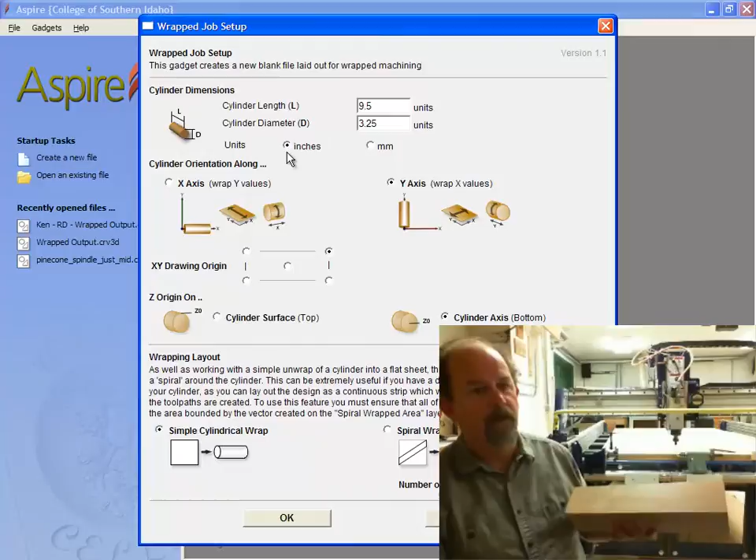Make sure you get the decimal point in there, and make sure you're on inches. We're going to go along the X axis. No, we're in Y axis always on our ShopBot. The XY is drawing origin, top right. We're going to do center of the cylinder axis. This time you're going to click on simple cylindrical wrap. Click OK.

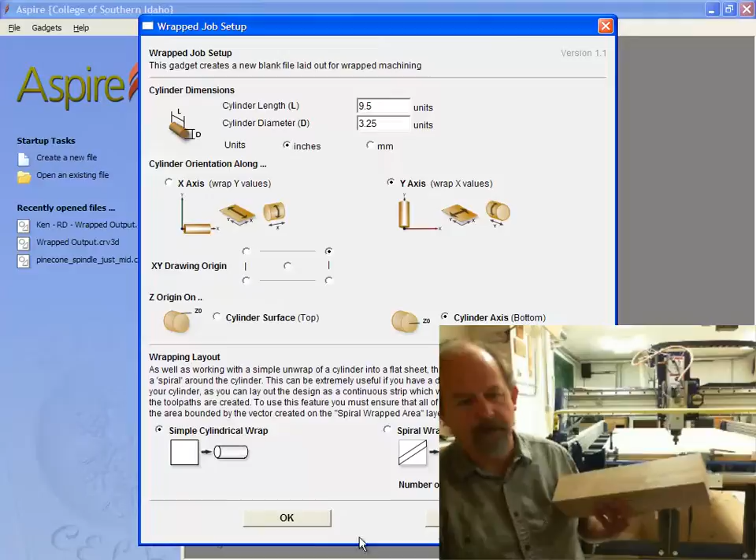We're going to go to Gadgets, under Wrapping, under Create Rounding Toolpath. The size of our square is 3.5 inch by 3.5 inch and 16 inches long. You want to make sure that this dot is highlighted. We're going to go down here to rastering. We're going to start with a square because we're going to leave some of these ends square already, so you want to make sure that the rastering down here is clicked.

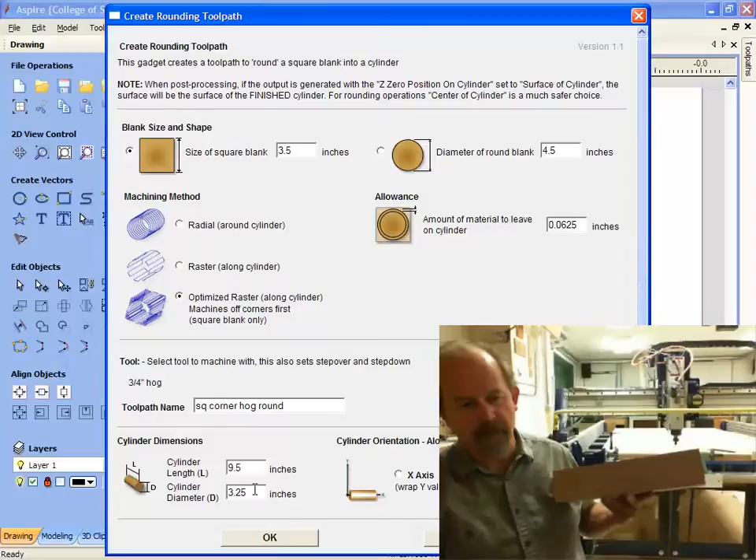We'd like an allowance of 1/16 of an inch, and we've typed that in here. Of course, we gave it a toolpath name of Square Corner Hog Round. You can name it whatever you want. We're just trying to get rid of the extra material we do not need. Our cylinder length is 9.5 inches, our cylinder diameter is 3.25. We're on the Y-axis. Click OK.

We're going to go up to Toolpath now, so click on Toolpath. You can see that a toolpath is created, and we can look at the 3D view, and you can see that it does show your toolpath. The extra lines here are showing the corners that it has to go through to cut.

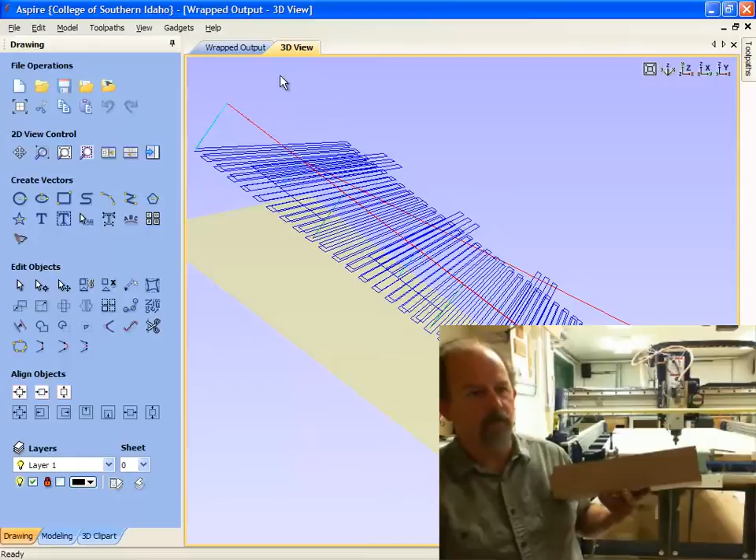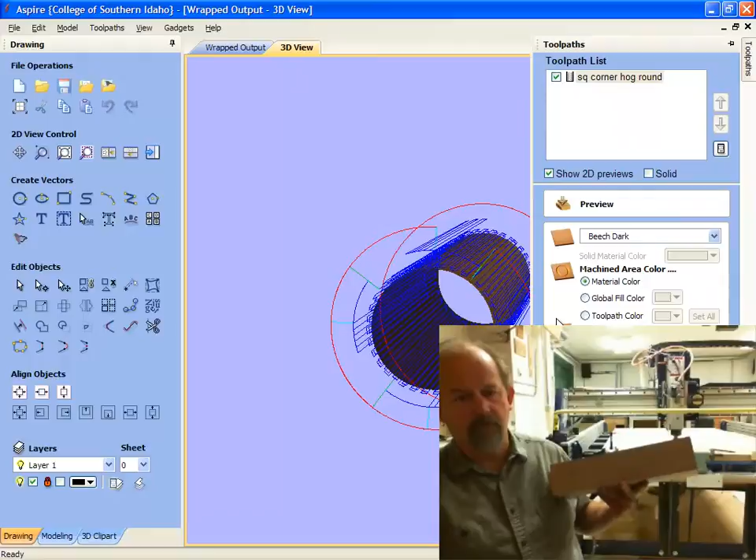If you want to see that that is round, we can go to Toolpaths, and under Toolpath Drawing you can click on Wrap X Values, and you can see that it's going to show you a cylinder. You can click on Preview, and we can preview Toolpath, and then it gives you a cylinder. Don't worry about that it's empty inside right now, we're just concerned with the outside. And so you have a cylinder.

Most of the time we'll be looking at creating a new file in Aspire. This time we're going to go to Gadgets. We'll go to Wrapping. We're going to Wrapped Job Setup.

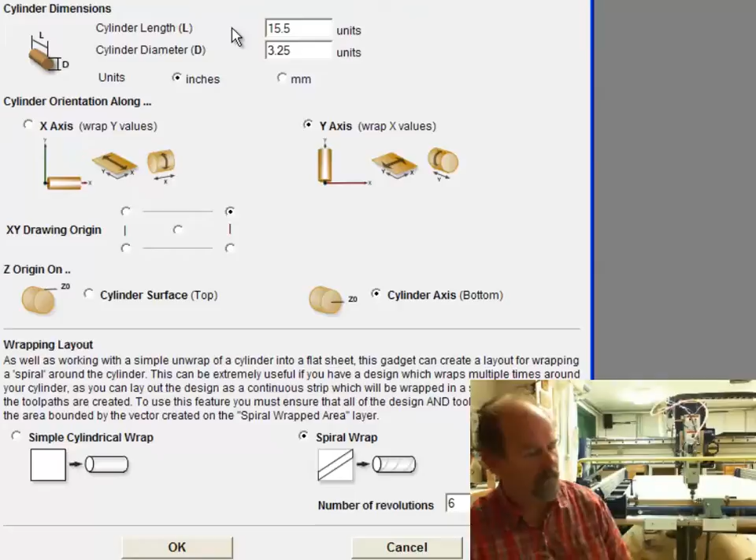We're going to get the length of our piece. And what we're doing is we're going to make a leg for this coffee table, and we'll have a square block on the bottom here. This will be the bottom of the indexer, top block of the indexer. In between here, this is what we're drawing.

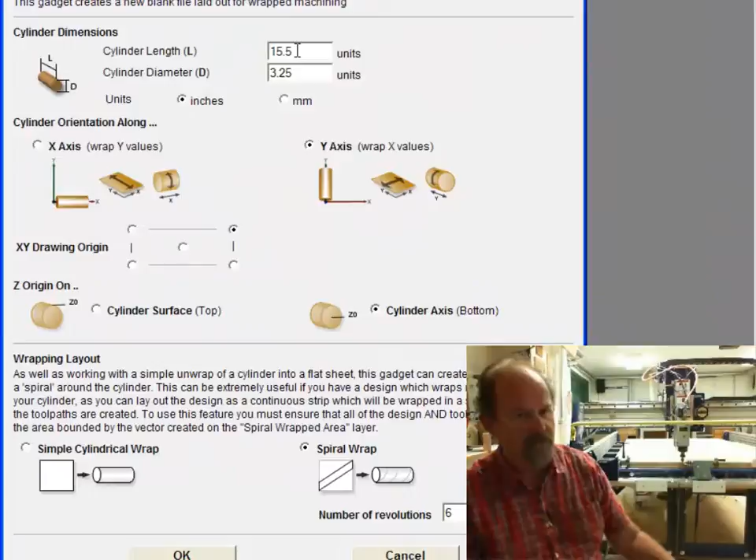We're doing a rope twist. So you'll need to make sure that you have 15.5 inches, which is the total length of the leg, minus our 1/2 inch. This is very important to make sure that you do at the maximum 3.25 inches.

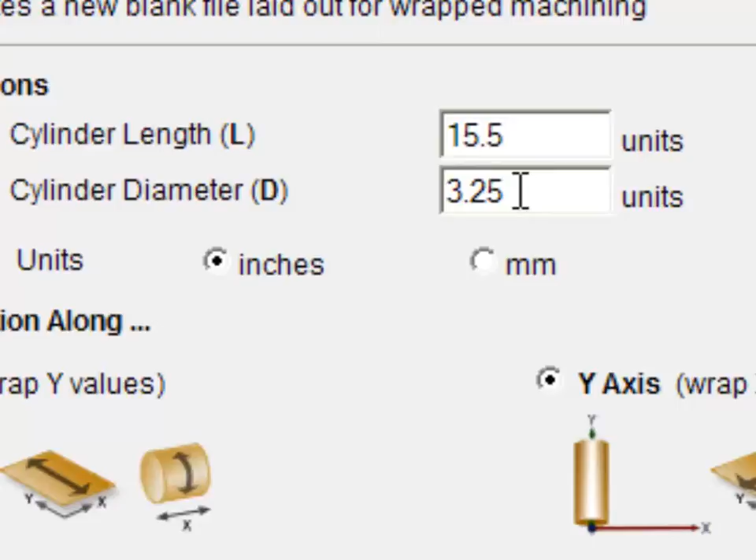Notice that I made it 3.25 inch on the cylinder diameter. That is going to be the radius around the rope area. However, my block is 3.5 by 3.5. So the reasoning behind that is when the indexer will cut and make the rope, we want to make sure that it's going deep enough so we don't leave any flat spots on the top of the rope twist. This will happen on a generic lathe as well, so you always have to cut a little bit deeper. On the indexer, we just do that to make sure that we have some depth of cut.

You want to always click on the Y-axis on our ShopBot indexer. This is explained in our previous video. Notice that we've selected under your XY drawing origin the top right hand, which is the bottom of our leg. Always click on cylinder axis, because that's taking us from the center point there, and that's where we Z and we center the Y, which is very important to get right in the center of that so that you can end up with your correct size.

Look at spiral wrap, and we want to click on that. If you were just doing a simple cylinder, a round cylinder, you would click, of course, on the icon simple cylindrical wrap. If we're on spiral wrap, click on that. Number of revolutions, what I want to end up with is 6 pieces of rope on top of each other. This, however, you can select a different amount, it'll wrap differently.

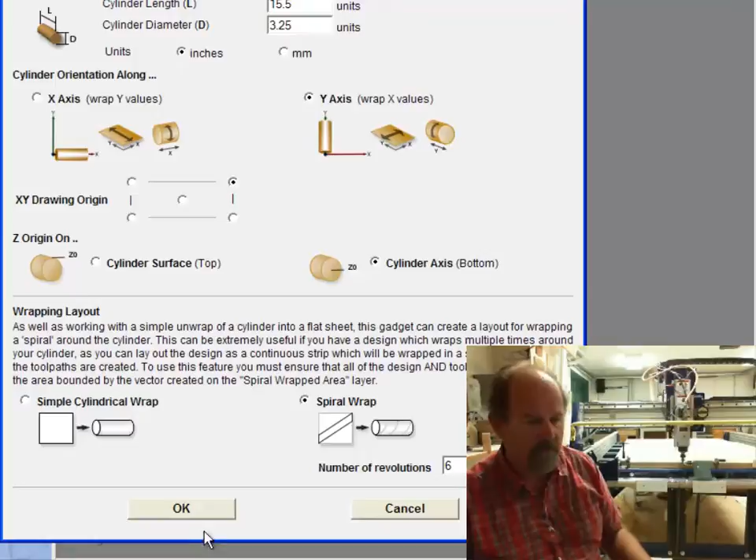Notice how our screen looks - this is going to be a little bigger and might not look correct to you. We'll cover that, but as soon as we wrap this, it'll make total sense once it wraps the drawing all the way around.

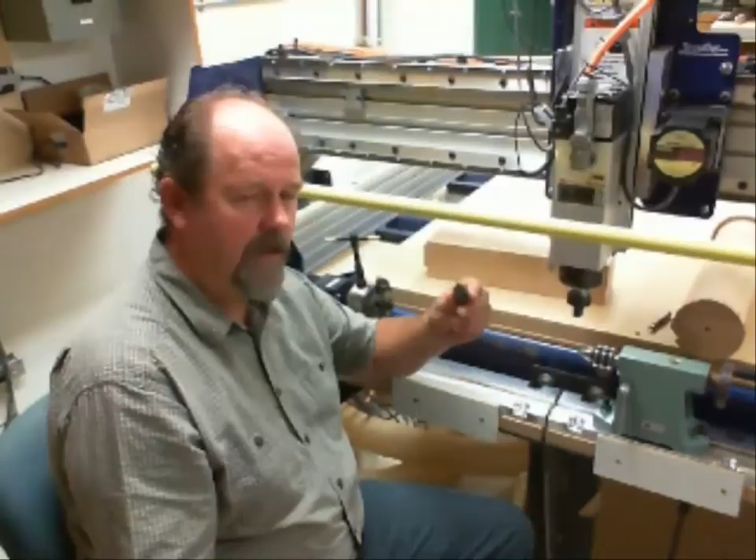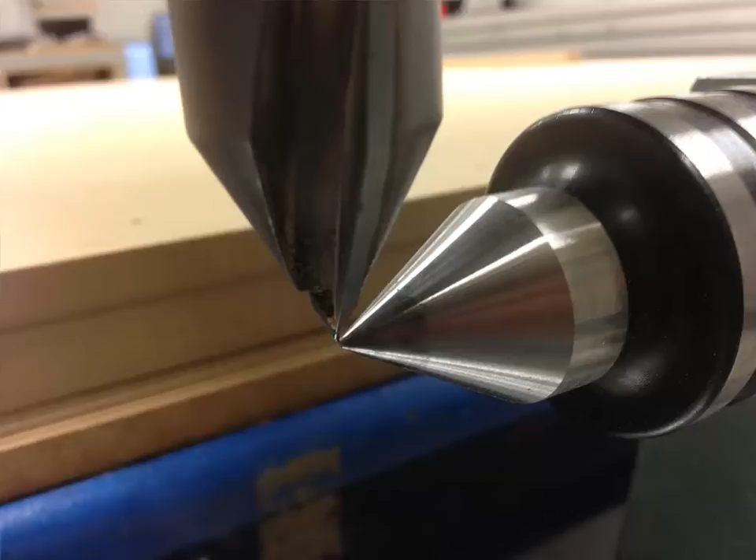Now we're going to set up the ShopBot Indexer. We're always dealing with 3 axes. We want to center over the tailstock. Earlier we used a V-carve bit, since it's so pointy, and adjusted the head down so we're centered right over our tailstock, because as soon as we give up our x-axis, this becomes used by our indexer, which is the a-axis. So you'll only be able to do z, up and down, and we'll z it here in a moment. We'll be traveling on y-axis, and our indexer is the a-axis, but it gives up x.

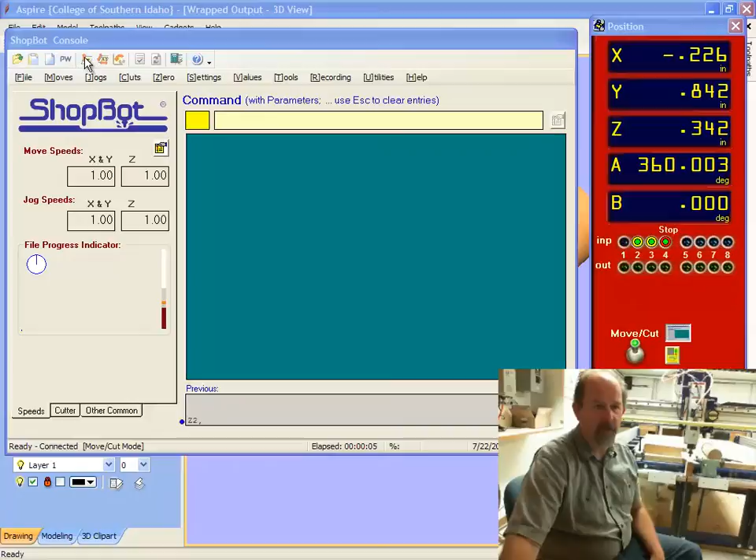If we set up an offset of this, it's going to mess up all of our calculations already done on our former program. So when we're going to do a Z, you want to cut a block that's dead center on height. We can put our Z plate down, then click on our Z and it'll come down and touch. With your ShopBot running, we have our Z plate in place, and we're going to come up and double click on our Z plate command. It'll always throw a box up as a secondary safety - enter when you've got the plate where you need it, click OK, and you'll notice it comes down and touches twice.

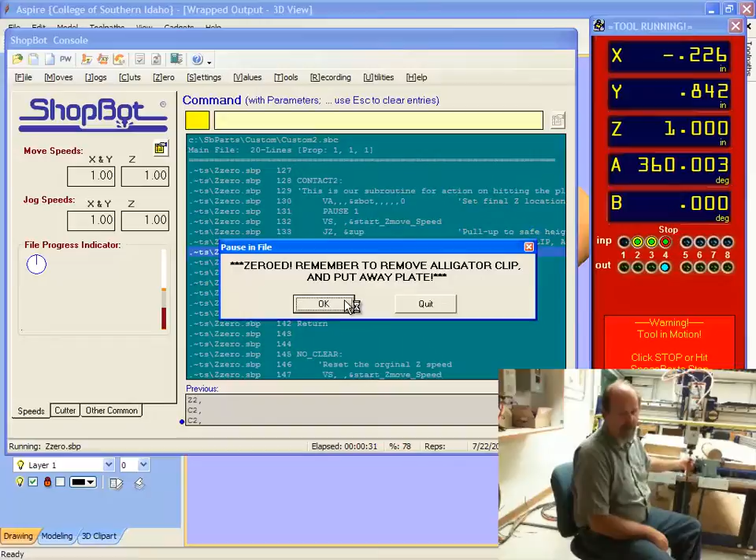Do not forget to move this. We've had students leave it here before, and it will get thrown out of the way. It can tear bits up, can tear other things up too.

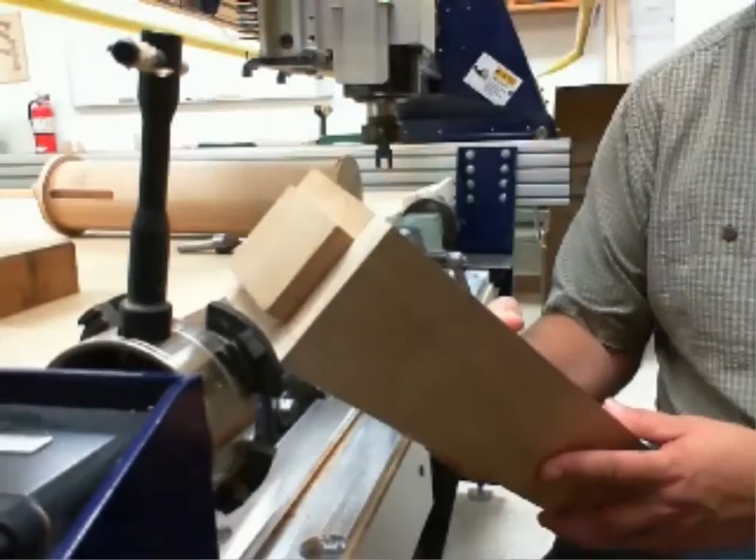Before we do that though, we found center of the end of our board so that we can find center of our tailstock. You can just adjust this in. Make sure you're snug up in the Nova chuck. Tighten this Nova chuck down. If you're not sure if it's tight or not, put it in a secondary hole too, and make sure you're tight. Tighten this up.

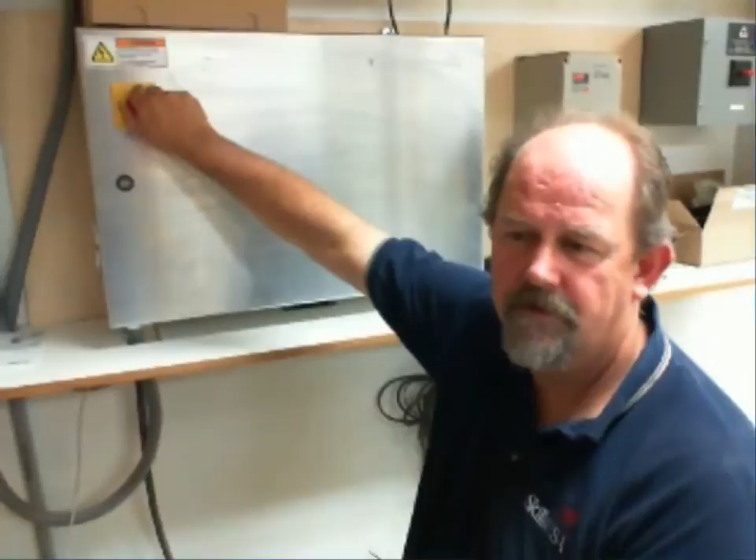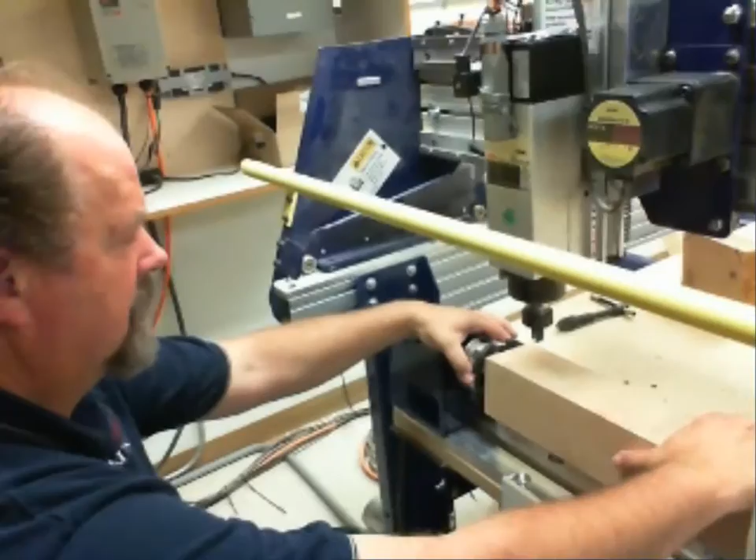Make sure you turn the ShopBot off so you're not fighting the servo motor to try to level this up. Now you can see how you can rotate the servo motor. If it's on, you'll be fighting the motor. We don't need you to tear up the motor.

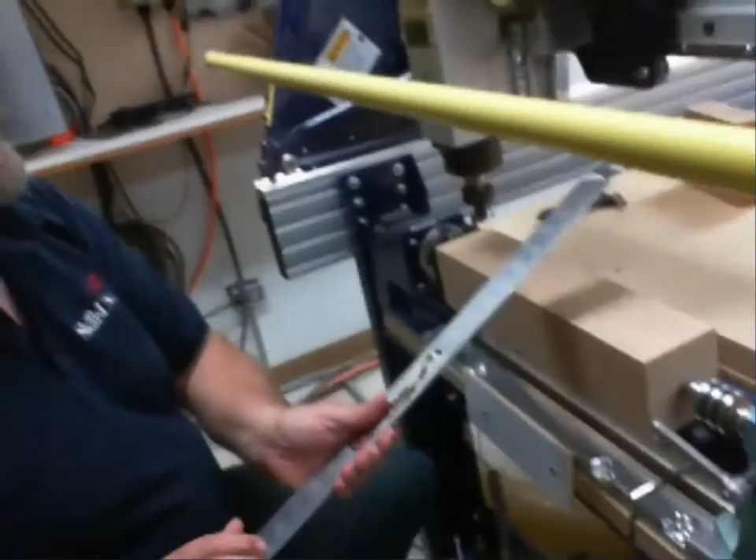You can just get a common square. You can use the front of the motor and level it. Notice how I'm sitting nice and tight to the motor now. That's sitting nice and true. And there you go. Now we can turn it back on.

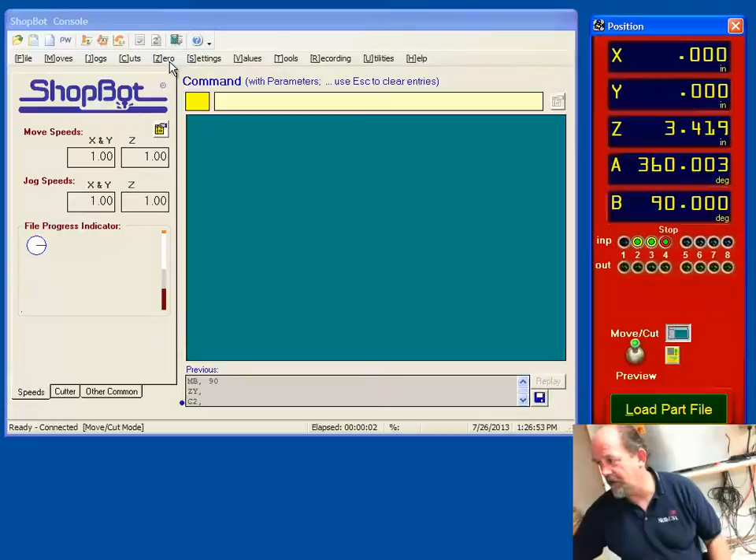You'll have to hit the reset. Click on OK to get that box out of the way. Now we can set up and zero our Y coordinate, which we've already done. We've went into our Zero command, clicked on that, went to y-axis and zeroed it. Now we have Y, Z, and X - or which becomes B on the indexer - all zeroed, and we're ready to do our rough cut.

We're doing our rounding path at this time, so we've already set all of our coordinates. Notice that we're leaving the top and bottom of the turning square - this is because this is the style that we want. We're just doing a round, 2 squares on top and bottom. If we were going to make a full radius all the way around, such as this one, we would 45 the corners off, so it would be less work for the CNC.

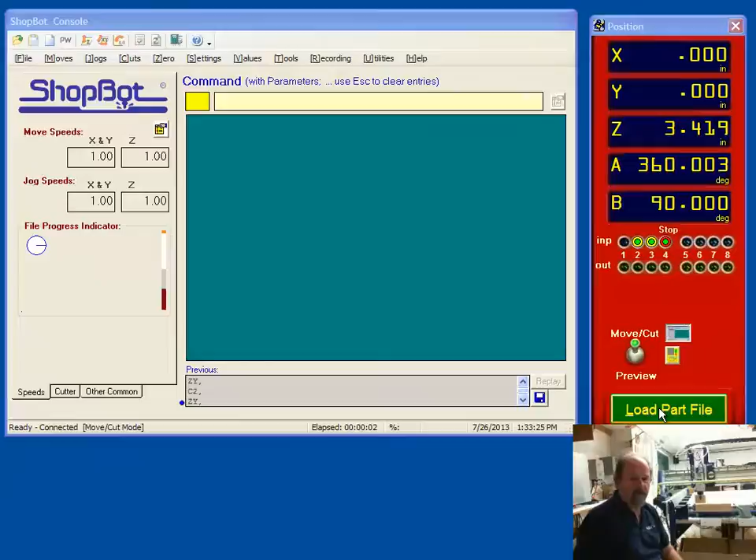You want to load your part file, go to Square Corner Hog, click on it, open the file, start, and set the router RPM to 12,000 - excuse me, and ours is already set on 12,000. We're good to go, click OK.

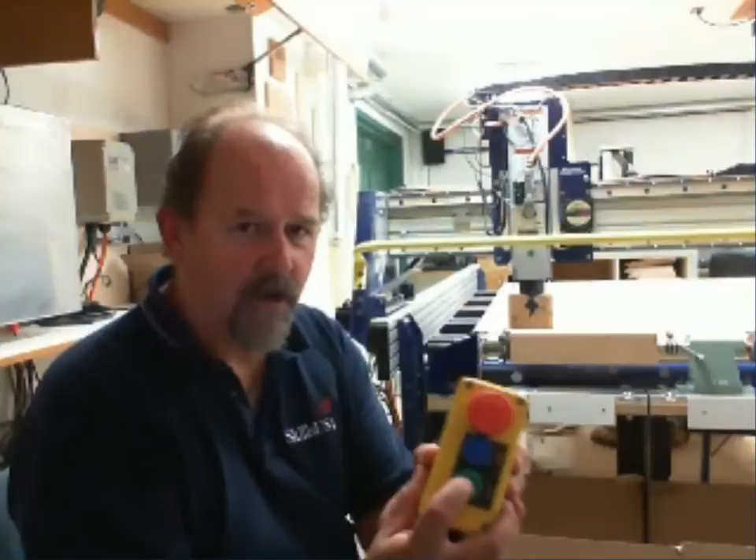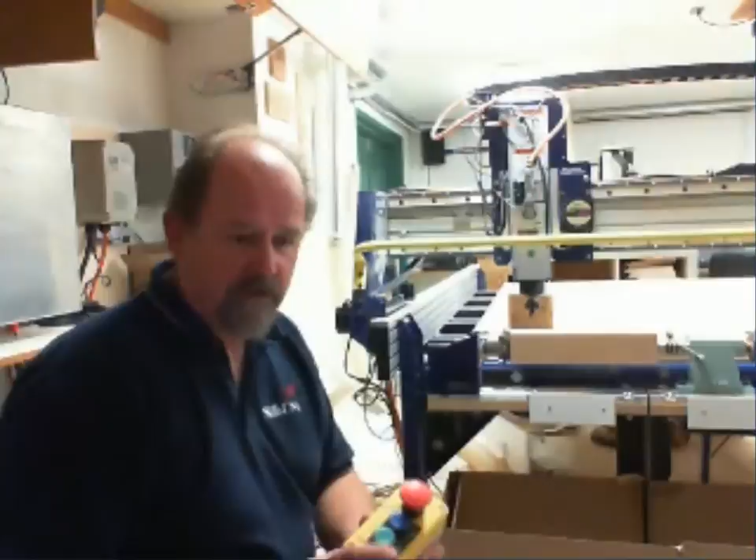At this time, this is where you can make a bad mistake. Make sure that you turn on the green start button before you say OK. If you accidentally click OK, it will drive this cutter into your work without it cutting, and you could break the bit or hurt the servo motor. So make sure you turn it on. Notice it's not moving anywhere until you click OK.

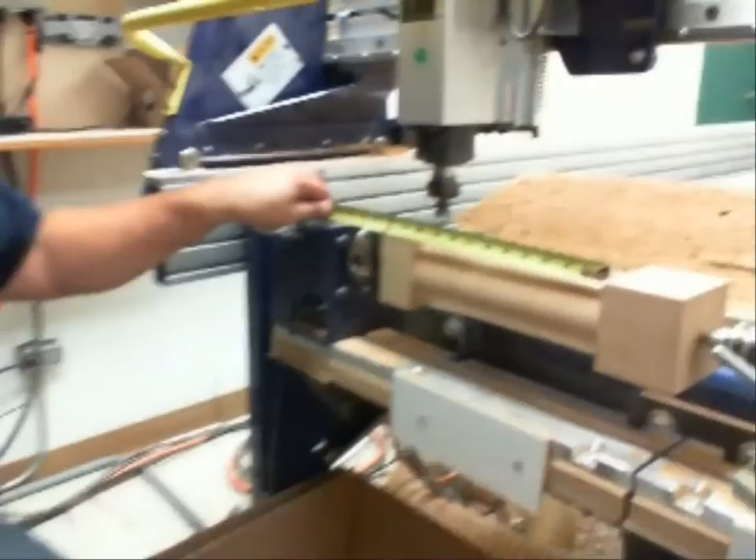I intended to show you this. We zeroed off of the center of the cutter. This is a 3/4 inch cutter, so where we wanted 9.5 inches, this gave us an extra 3/8 and an extra 3/8, which give us 10.25. This is a very common mistake that we do not want you to do. So whenever you have a cutter, you need to find the outside edge if you're cutting between square and square.

If we were just doing a full round, you wouldn't have to worry about that, because the cutter would be off the board a little bit, no problem. But when you're going between pieces, add from the center out, take that away. Your zero point should have been in 3/8 and 3/8, or you should have set up for 8 3/4 center to center.

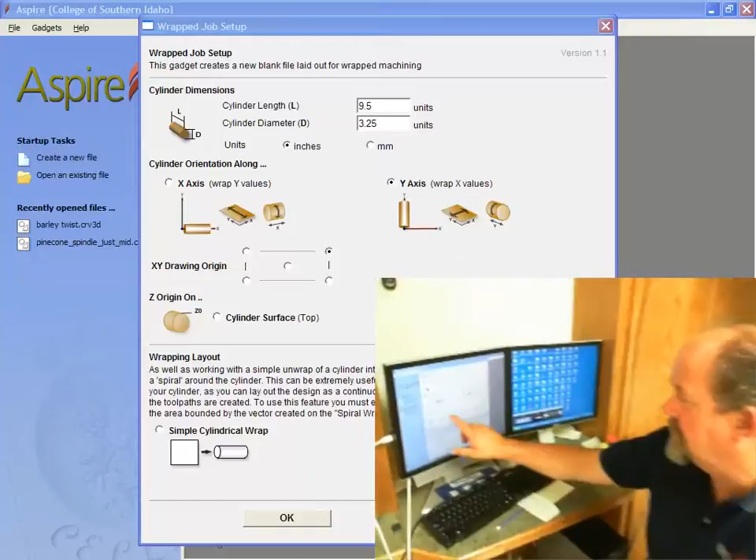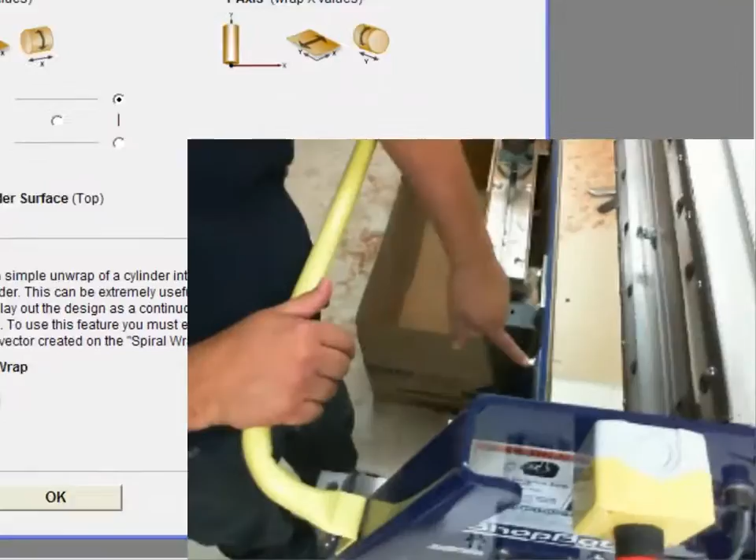To better explain our XY origin, we've selected our top right hand on our XY coordinate. Let's look at the ShopBot table, and let me explain why that's easier. On our table, this is our home of 0, 0, X and Y.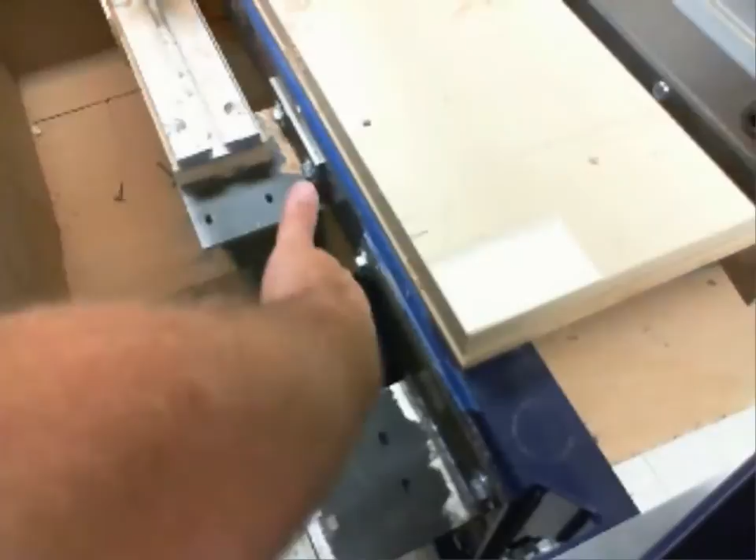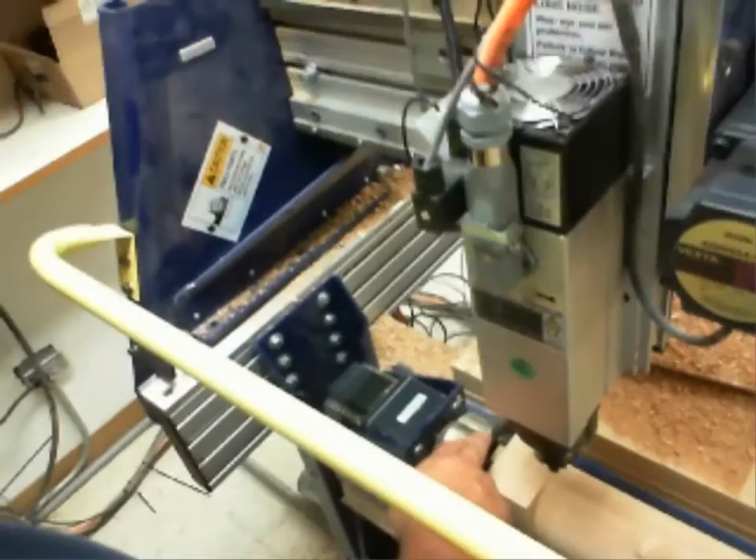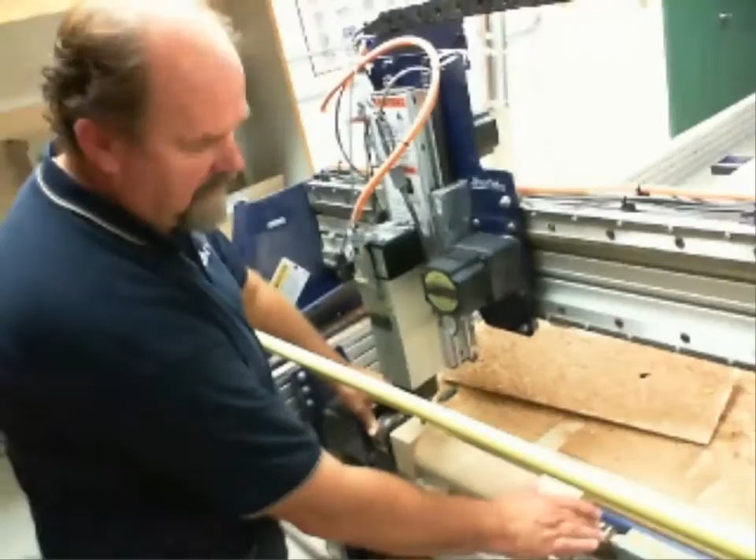X is condensed to nothing, it becomes B, so we're only worried about Y. We select the top right, just so if you follow me over here, that Y starting point is closer to the indexer head, which holds the Nova chuck. If we have any problem from 0 on, if we're going to hit anything, it'll hit the tailstock, which is less costly. It won't hurt the servo motor either.

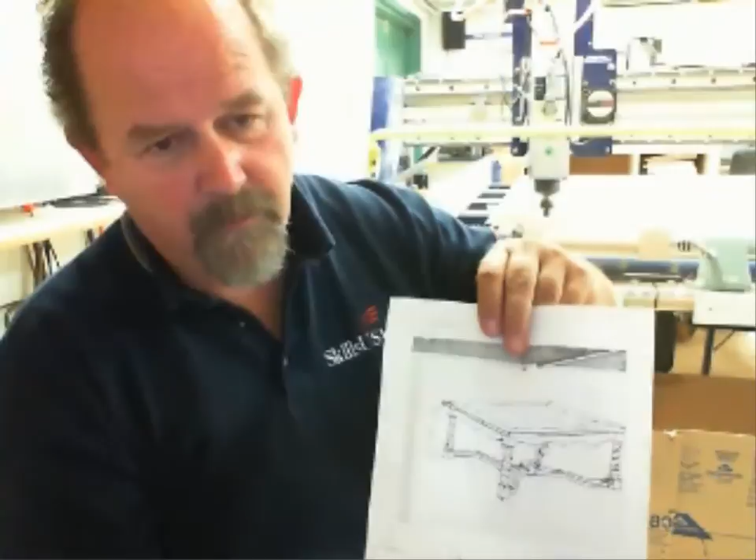If we select the bottom and try to start from here, there could be a problem with hitting our Nova chuck, which is expensive, and damaging our servo motor. So that explains why we start on the top right with our Y. After we have our dimensions on here, you can see that now we're at spiral wrap. We've selected 6 revolutions. This goes with our sketch of our leg that we want to have 6 ropes on top and bottom, square of course.

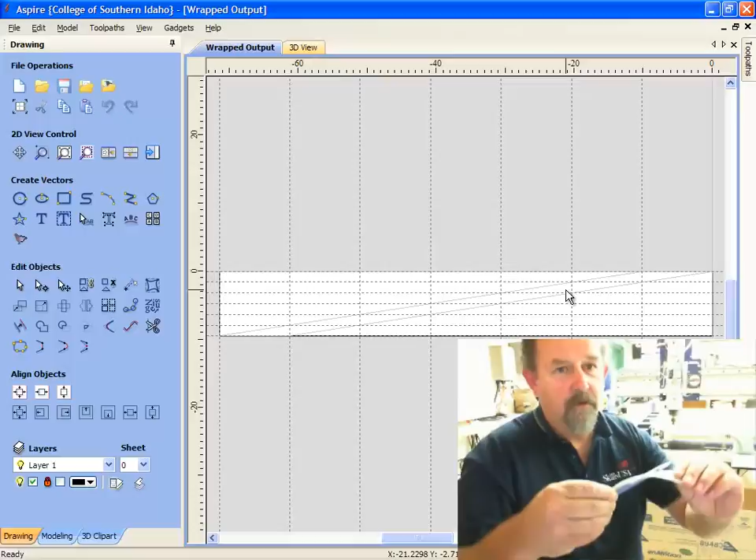We're going to click OK. We've got a layout here and it separates into 6 different areas or 7 spaces. You can also look, just to help you, we've got a strip of paper here, and I'm just going to take a pencil, which is a cylinder, and we're just going to wrap this around, and you'll start seeing how the spiral wrap of the Aspire program will make our spiral cut.

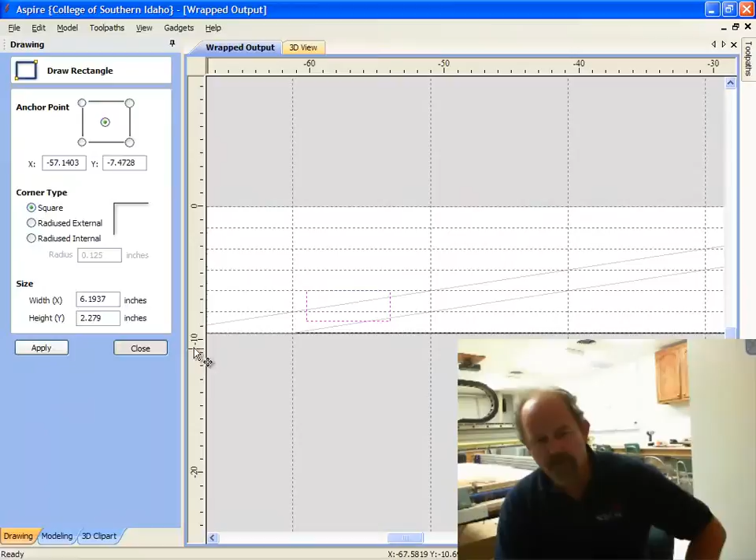Since these 2 rails are not perpendicular to a true 90, we're going to draw a box, and this box we will rotate so that we will sit at a 90 degrees to our 2 rails. This is important to be able to come up with a true 90 so that we can measure the width of our 2 rail sweep. So we'll go from 0 to the other, and you'll see that 1.5815 is our distance that we'll be working with.

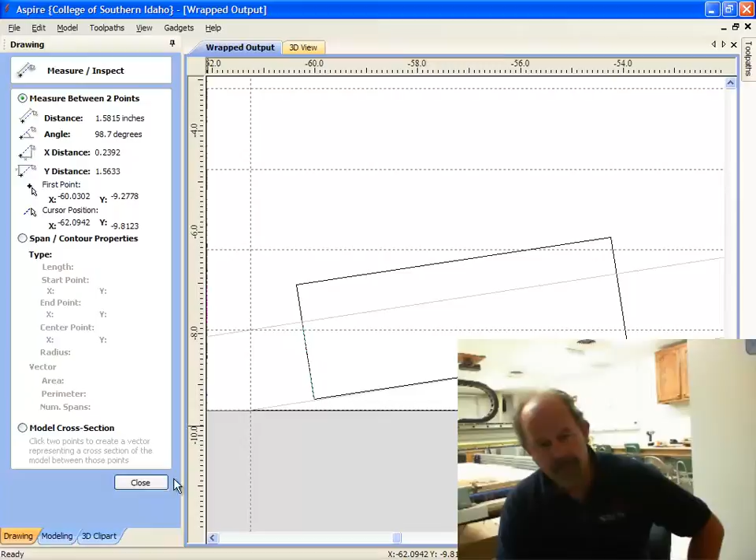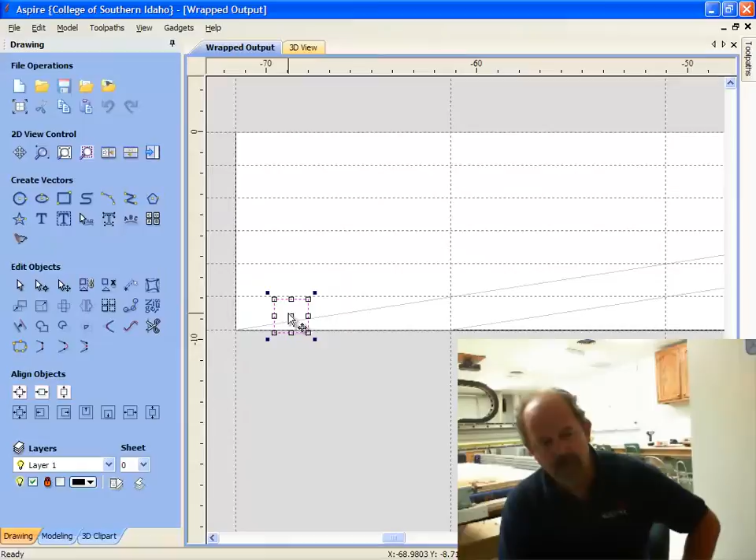We'll click close. We're going to draw another box that now we know the dimensions on. X is 1.5815. Our height is half of our cylinder, which is 1.625. We'll move that box down and we're going to position it basically at our start. The reason why we want to start with a square is just like our rough cutout. Remember that this is in our Nova chuck here.

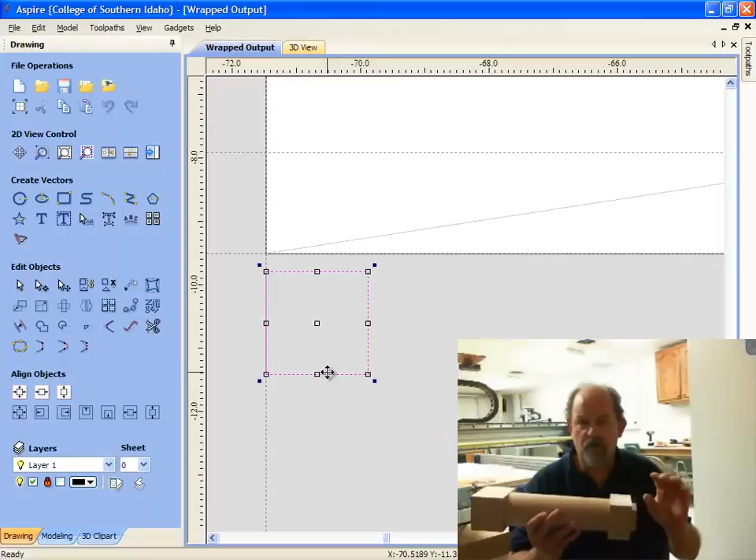We want to start from square because we're going to have a transition from square that's going to work into the rope. If you don't start with a square box, the rope will just die into the square and it doesn't look correct. You'll see this as we work on. Now we're going to use node editing, and we're going to delete the bottom of this box. We have to have it open. 2 rail sweeps only work with open vectors.

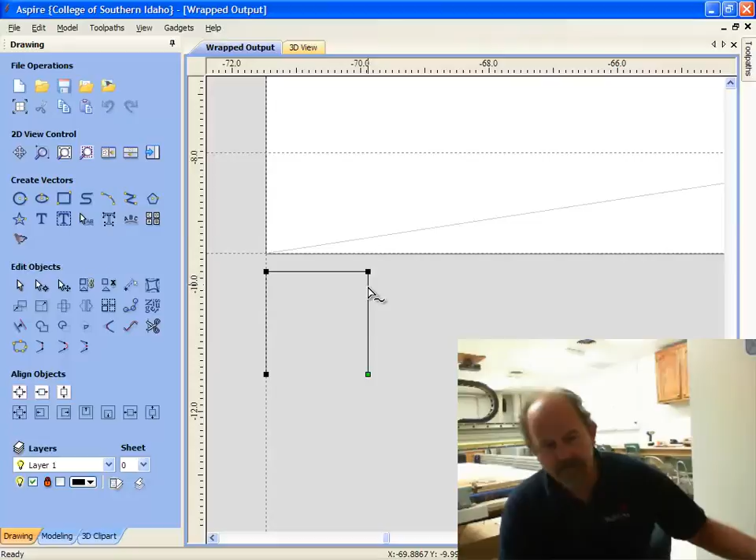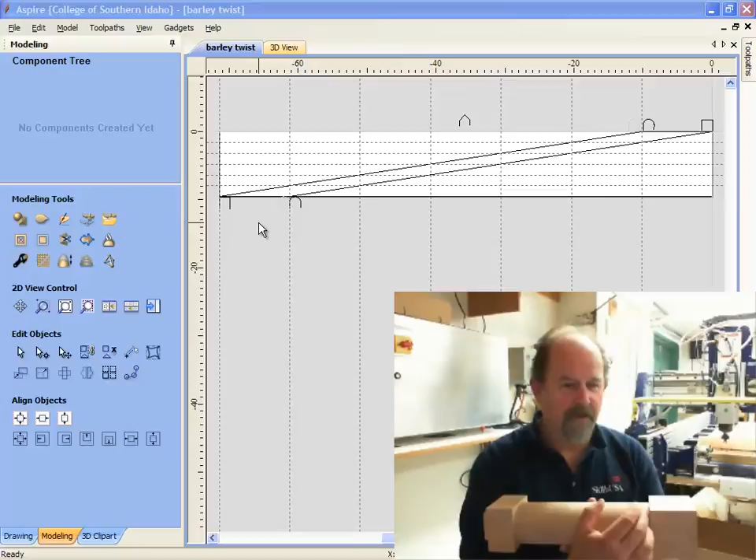So you can see we've added several geometric shapes. We've gone from a square to a radius, and you can see the cross sections on our screen as well as on the turning here, that we're going to have a transition point from square into the rope. We've deviated a little bit just to show you a different geometric shape, such as in the center.

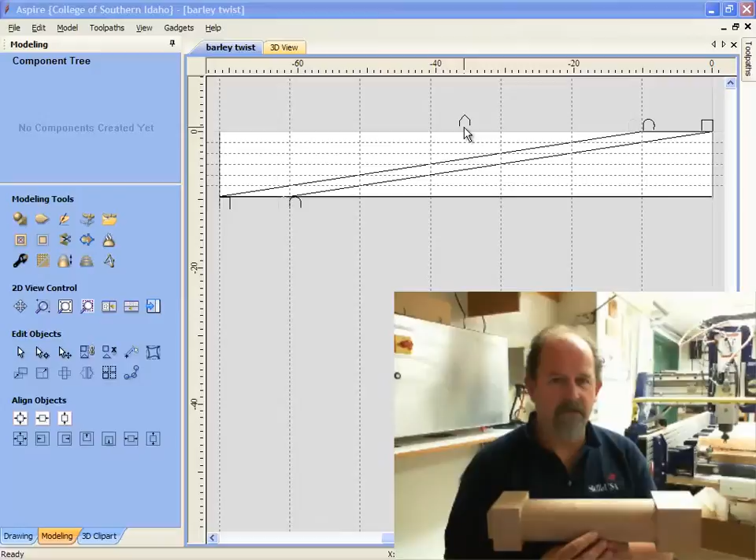We're going to put a V groove in the center of our rope just to show you the capabilities of the ShopBot Indexer, but also your own capability. You can put any geometric shape in any of these sections and come up with your own design. So we've deviated from the rope twist and just added another element just to show you some capabilities.

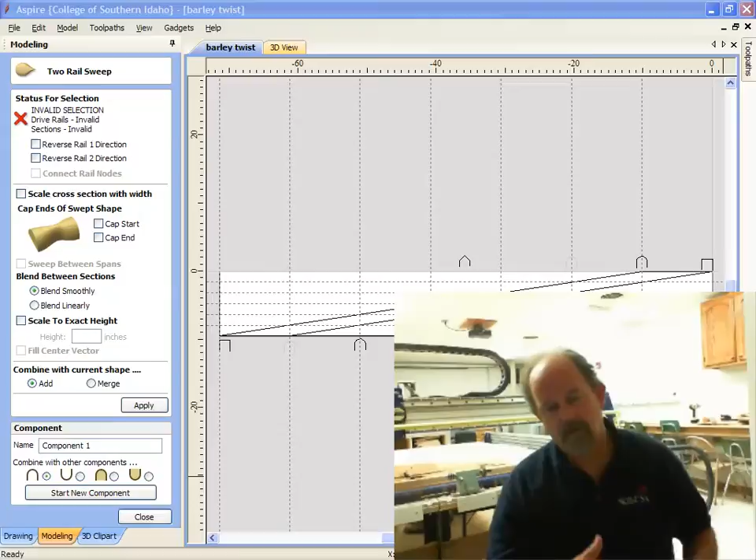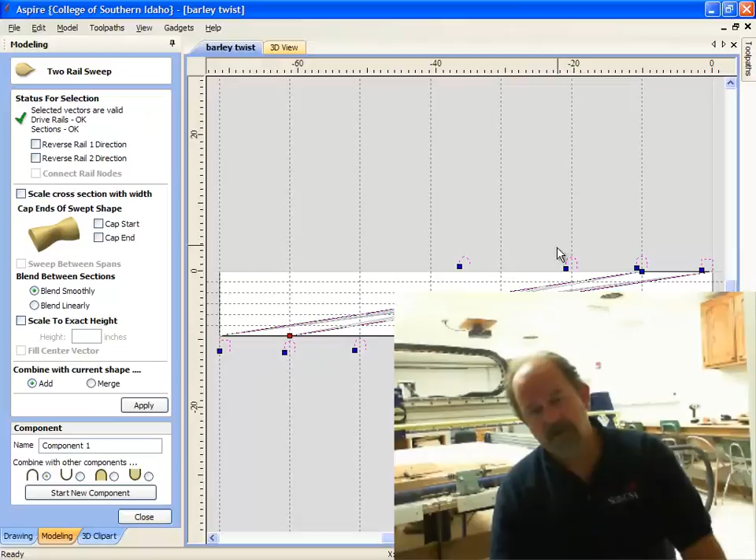We're going to create our 2 rail sweep that will create our 3D object that will wrap around our cylinder. You can see the different geometric shapes. Choosing them in order is very important. We did a double of our rounds so that we could make a tighter transition to the end. As you can see when we zoom into our layout, all of our lines are crisscrossing on the top.

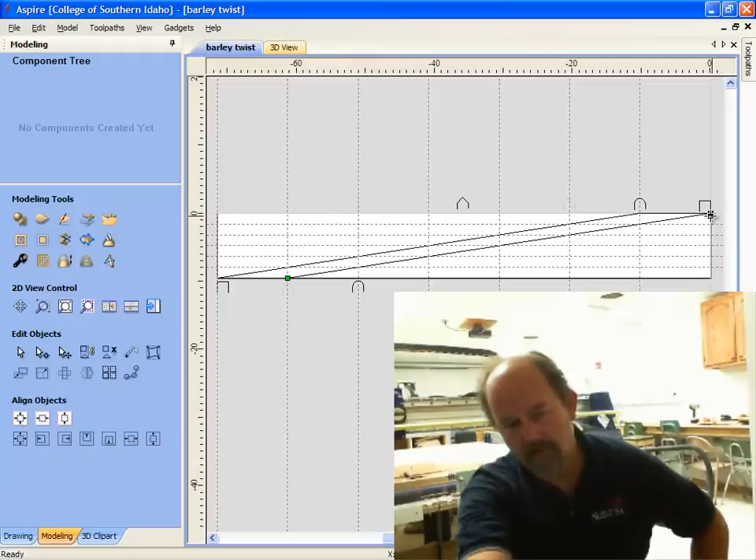So if we back out of this you can see if I click on node editing on our first line, it has a start point in black and it goes to a green, which is our finish of our line. When we click on our second rail, we start with black and we end in green. Well, you can see these are opposites, starting and stopping from each end, and once we select that, it goes in a circular motion. That gives you black to black, green to green, which gives us that crossover.

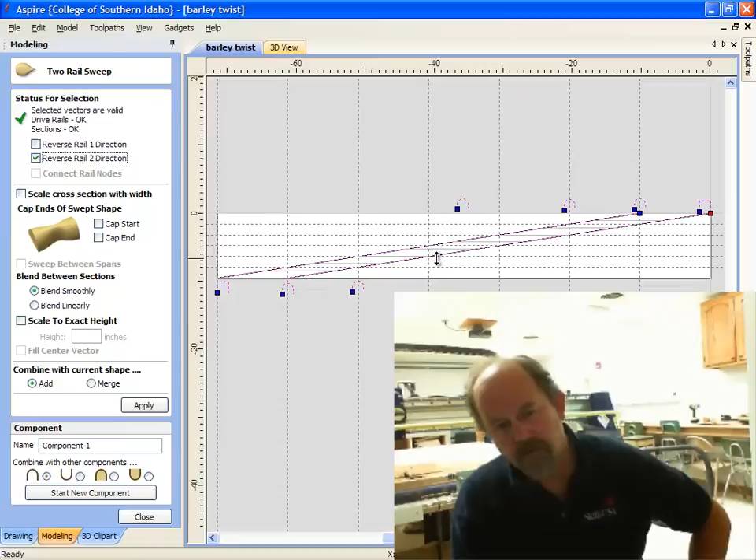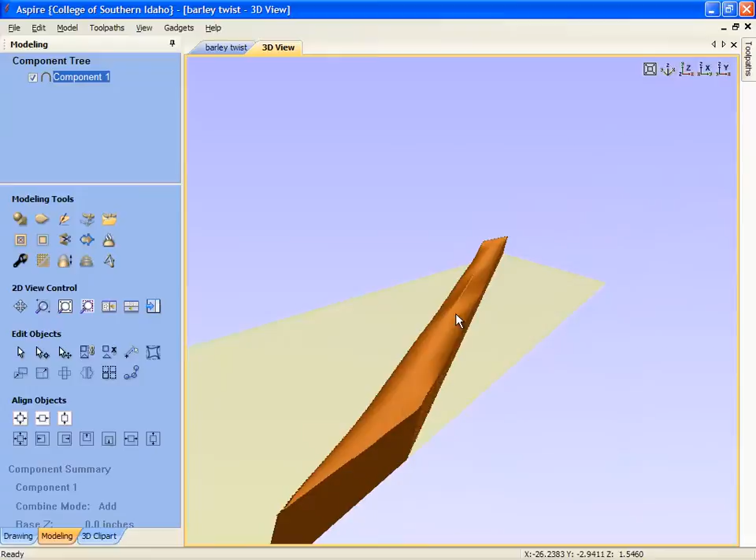So to fix this, we go to reverse rail 2, and you'll see that it will straighten out our profile of our particular rope bead. So we're going to go to scale to exact height, which is 1.625. We're going to apply that. We're going to close. We're going to go to our 3D view, and you can see by adding that center point that it has a very pointed center area, but you can see from square into the rope into our pointed center.

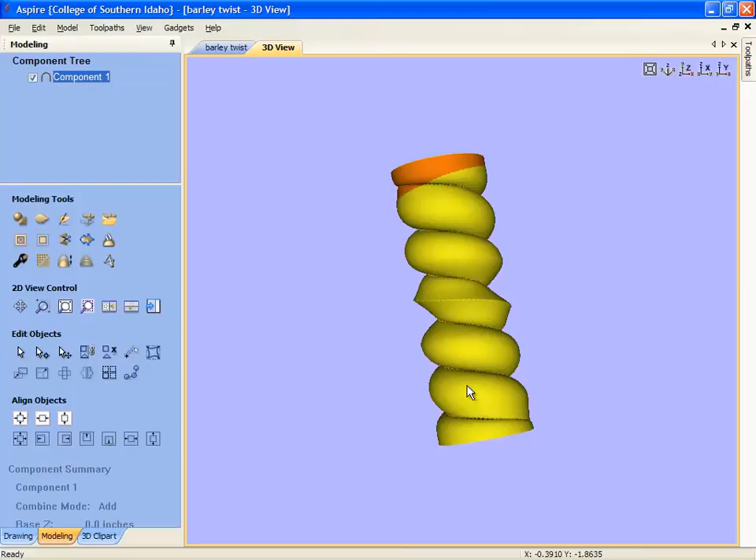Now let's go ahead and wrap this so we can see what our cut will look like on the leg itself. You can see that we have a good transition going from square into radius, and you can see our V point right in the center too.